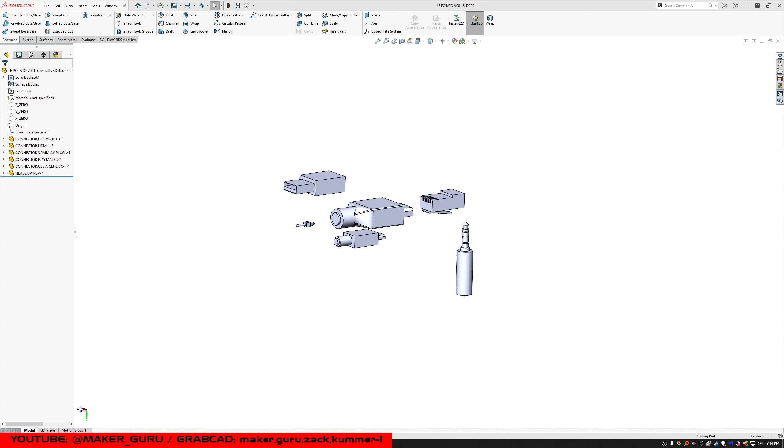Hello again, Internet. In today's video, I'll be modeling up a small single-board computer called Le Potato. It's theoretically a low-cost competitor to the Raspberry Pi, but in reality, you can't buy a Raspberry Pi anymore, so it's not in competition at all. You can still buy this, though.

In the audio for today's video, I'll be discussing the results of a research project I gave myself, seeking to find the best CAD software in the world in 2023, ideally something to replace SolidWorks.

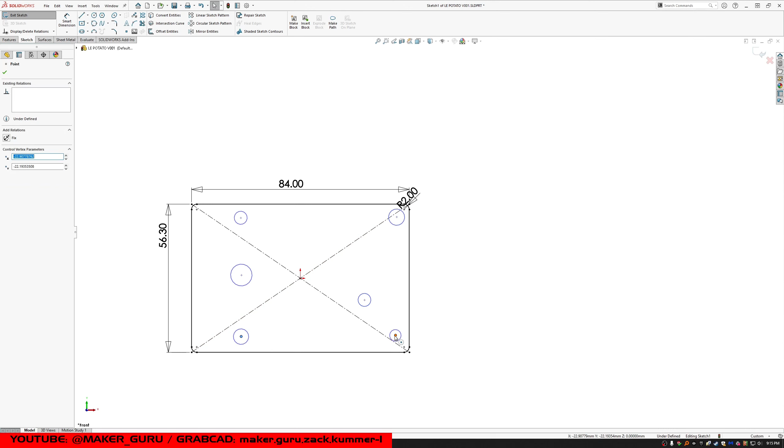So first, why? Partly, it's just a good idea in general. New software with new ideas and better design can come out, and old software can get so much better over time that it's effectively something new. There are still some mechanical engineers using AutoCAD, for example, and it's not because it's good or efficient or fast or anything like that. It's because they don't bother to look for something better, and they just kind of stick with what they're used to. And I don't want to be that person.

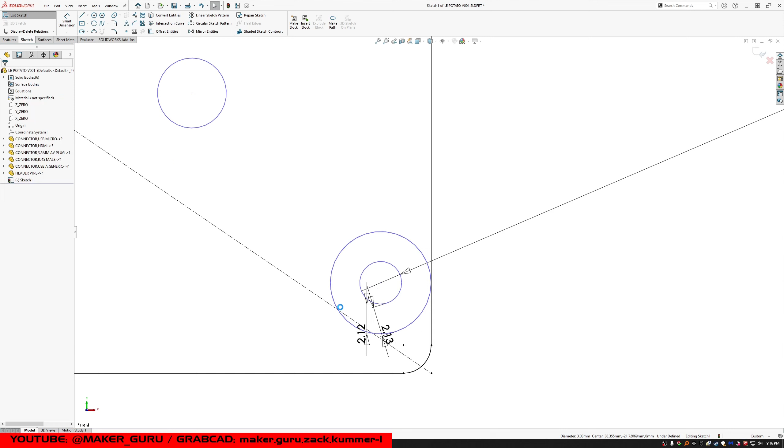Second reason has to do with SolidWorks itself. While it does continue to see some development, most users agree that it's been getting worse recently. SolidWorks 2020 seems to be the last good release. Service Pack 4 and Service Pack 5 are both pretty good. But after that, SolidWorks 2021 came out, and that started to be a problem - new bugs, stability issues, and some new features, but they're not really needed by anyone. Then 2022 is worse, 2023 is even worse than that. And at this rate, eventually it's just going to become completely unusable software if this pattern continues.

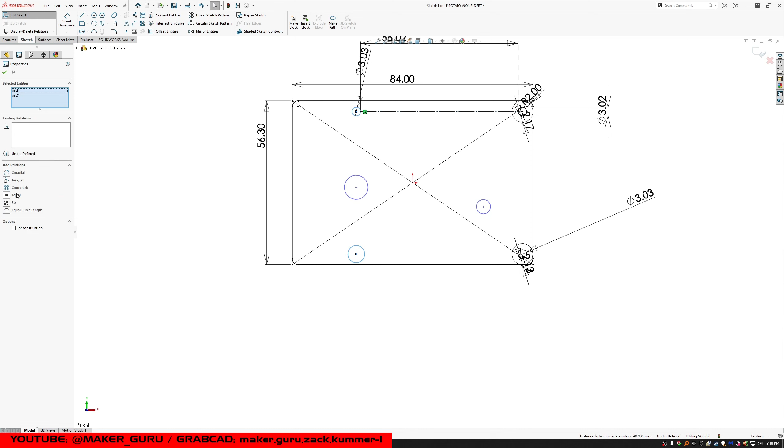So those who purchased SolidWorks 2020 can continue using it as long as they like. If they're on a subscription, obviously they can't, but if they actually purchase a perpetual license, they can keep using it. Those wanting to purchase 2022 today can still do that, or they can still purchase version 2020 today. But it's unclear how much longer this will actually be the case. Right now, most resellers I've seen only go back to 2019 or 2020. So over time, that's probably only going to go back to 2021, and then 2020 is just not going to be available for purchase anymore.

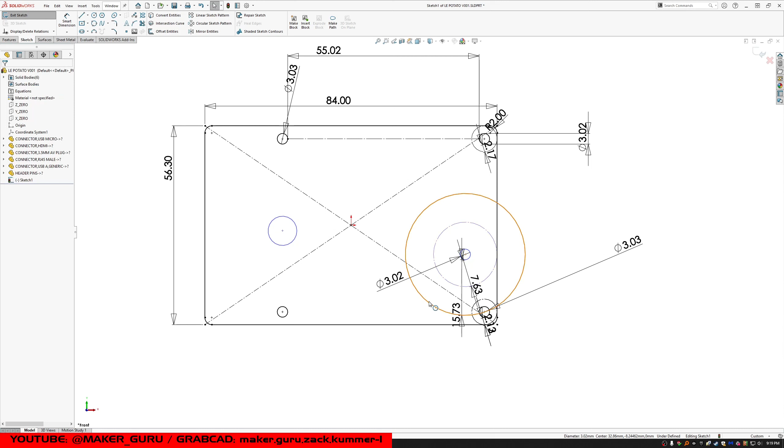Students and makers looking for low-cost licenses for non-commercial use, either educational or just making stuff for themselves, don't have the option for 2020 at all. Even 2021 is no longer available to students and makers. So basically, students and makers cannot get the best version of SolidWorks yet released. Those willing to pay thousands of dollars for a license can still get a copy, but again, might not be the case much longer. And even if we assume SolidWorks 2020 is still the best CAD software available in 2023, its current and future lack of availability is a serious downside. As someone who wants to teach people how to design things, teaching SolidWorks is starting to feel a bit awkward because of this.

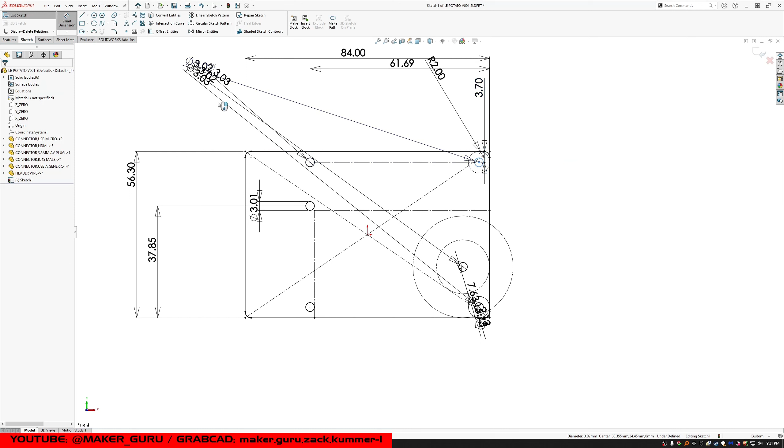So I started my research by looking online for lists of CAD software. I found several long lists, and after combining them and removing duplicates, I ended up with a list of 94 programs, including SolidWorks. Many of these were eliminated quickly just by looking at the product pages and seeing that they lack very basic features any mechanical designer or engineer is going to need in a typical workflow. Using this method, I was able to trim the list down to just 12 programs, including SolidWorks. And I'm just going to go through them alphabetically because that seems like the most logical way.

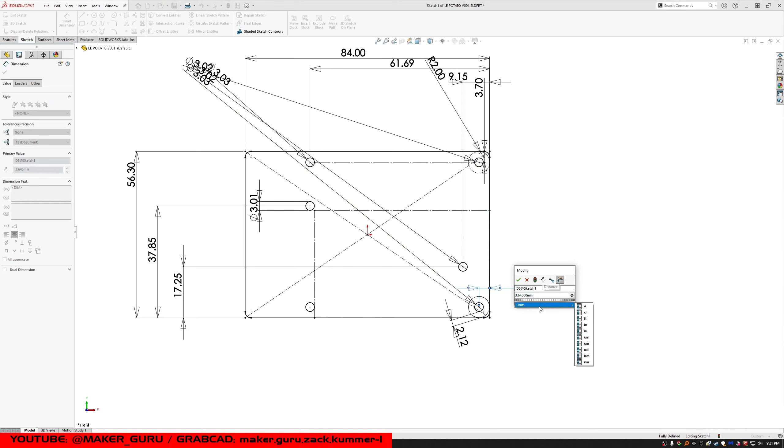So first, before I start the list, I should mention a few things. Cloud software - a couple of the titles on this list are cloud software, meaning either you don't install them on your computer, or you do install them on your computer but you need a constant internet connection anyway. And I'm not a big fan of cloud-based suites because, well, number one, not everyone's going to have reliable or fast enough internet to actually make use of them.

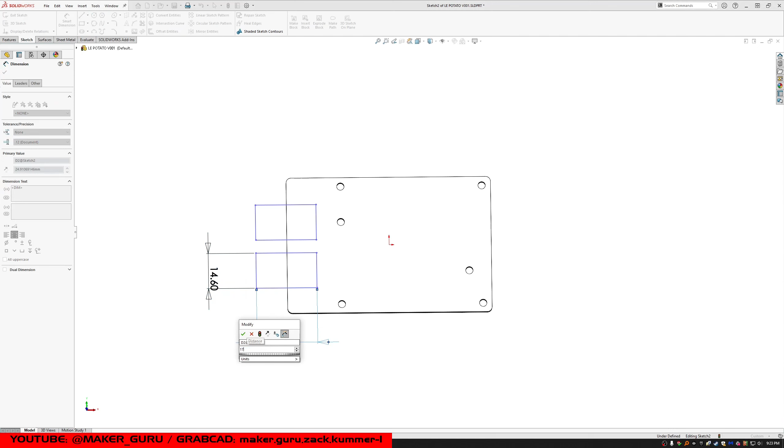But also, there's an issue of support. So if their servers go down, and it's not your fault at all - your computer works fine, your internet is fine, but their server goes down, their internet goes down, whatever - now you can't work. You just gotta wait for them to come back up. If they remain down because the company doesn't want to continue supporting them, or they discontinue the software, then your time learning that software is kind of a waste.

And you also might lose valuable data, to the point you can't use the software anymore. If you're lucky, you might be able to export steps before the software goes down, but even then, a step is not the same as a feature-based model.

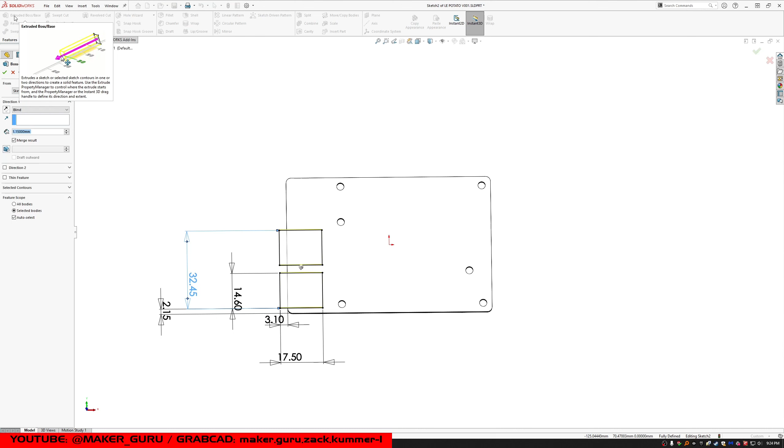Just a quick story. Years ago, I was using a cloud service provided by Autodesk, and it started out pretty good, as long as I had a good internet connection, which I didn't have at home, but at other places I did, so I just used it there. The software worked great.

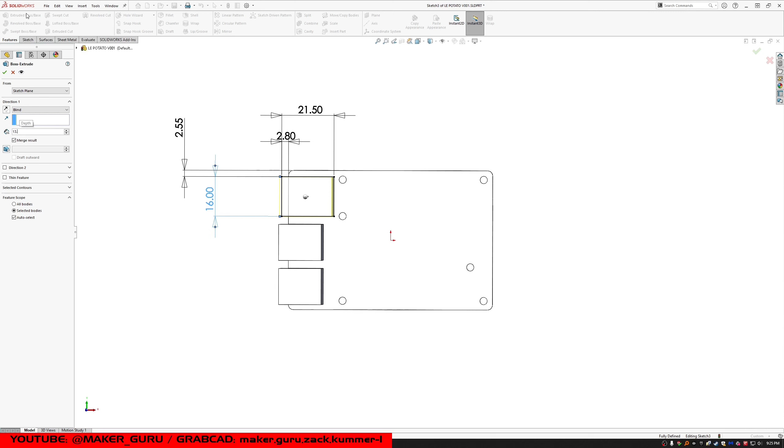But over time, it got popular because it was free and it worked great, and Autodesk did not invest in the servers. Over time, the service became terrible. What originally took about half an hour to process would now take several days. Then one day I went to log in and the service was just offline. My files were gone, the workflow I developed was useless, and there was no warning even.

So cloud services of all kinds have had similar ends. Usually they'll at least give some warning to allow users to download or transfer data, but not always.

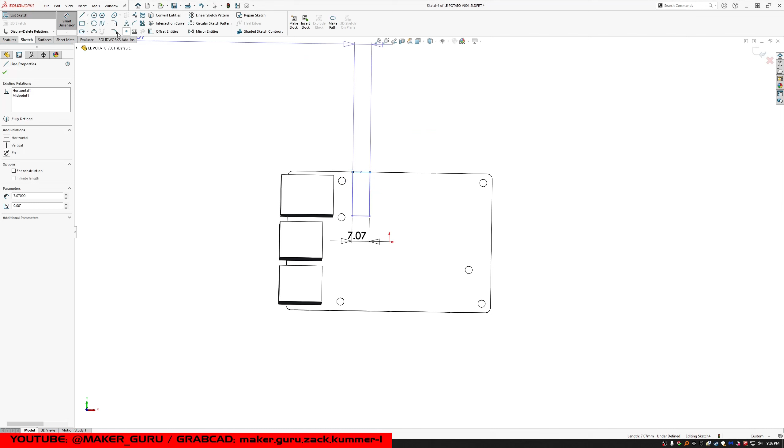Just as an example, about a week ago-ish, Google Stadia was taken offline, and that was a complete dumpster fire, because parts of it started going down like a month in advance. People had already paid in advance for stuff, and people had paid for games that now they can't get. Some people that paid for games get to keep them, but if they paid for them in a different way, they don't get to keep their games. It's a whole mess.

So while I'm giving cloud-based services a chance, if any of them are actually good enough to be considered the best, I have to consider that there's a distinct possibility things will not stay as they are, and it's possible those services might not even exist in a few years.

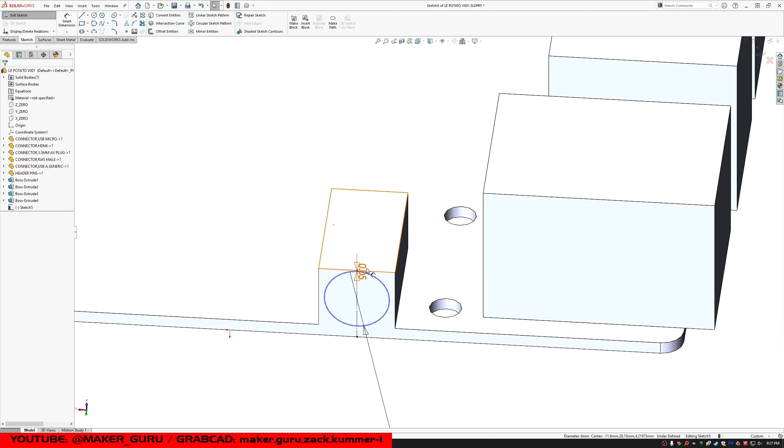Second, I need to mention subscription models. Traditionally, software came with a perpetual license, so you buy it and you can run it forever. You might want to buy another version next year because it's got new features and whatnot, but you don't have to. If the current version does everything you need, you can just keep running it.

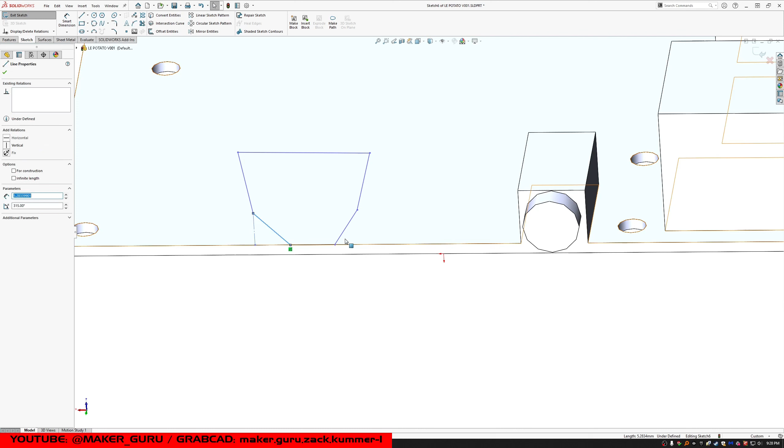Nowadays, subscription software is getting a lot more popular, so the initial expense is usually lower, but over time, at a couple years or a few years, the subscription ends up being about the same, and then eventually it ends up being more expensive.

That's the whole reason they switched to a subscription model. If they wanted to lower the price, they'd just lower the price. The whole point of subscriptions is to make more money off of you. So that's a bit of an issue.

But what's more significant is that it times out. If a company wants to just stop selling the subscription, well, you don't get to keep using the software. That's how it is. And a lot of the titles on this list are subscription only, which is a big downside for those reasons.

I'll still give them a fair chance, but if it turns out one of these titles is currently the best, I have to consider that new versions might not be, and you will not be able to continue using current versions forever. Alright, so on to the list.

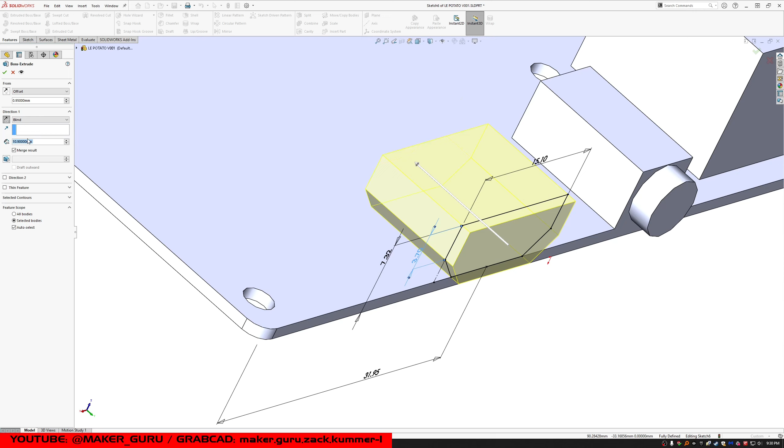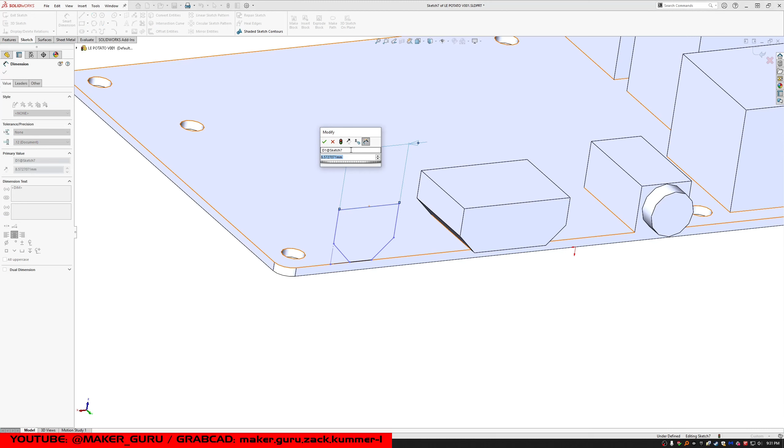Autodesk Fusion is a cloud-based CAD suite. In spite of being cloud-based, it looked pretty promising at first. Some things I consider essential are missing, but it also has some pretty cool features that SolidWorks doesn't. It's even free under certain circumstances, which is a huge plus. Even if you're a company that's selling stuff, if you're small enough, the software is free. And even if you're bigger, it's not that expensive, at least by the standards of CAD.

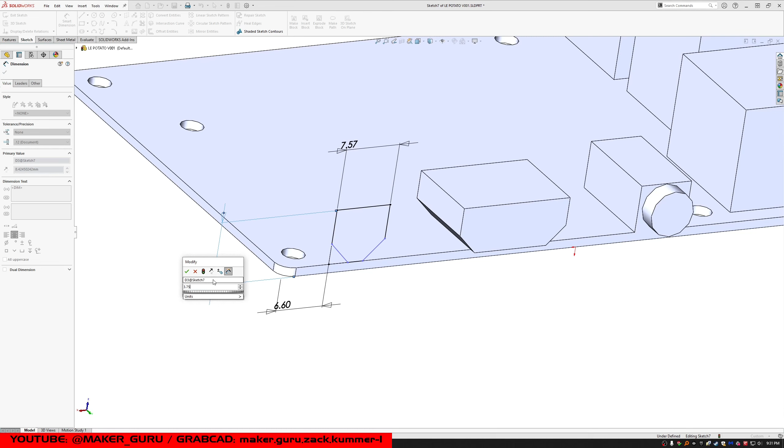Modeling is pretty much what you expect if you're used to SolidWorks. There are differences, but they're minor. Assemblies are different than SolidWorks, and even people that use Autodesk Inventor, made by the same company, are going to notice pretty significant differences. Drawings are also completely different.

Overall, it does work well. It's a bit slow, a bit choppy sometimes, and there's a bit more waiting around than I'm used to, but it does work. For free, I can't really complain about those issues. It's also pretty stable, which is rare in CAD.

The big issue I ran into was with assembly complexity. The program basically just falls on its face with assemblies containing over 2,500 parts. That includes screws, nuts, and washers.

It doesn't take that long to get to 2,500 parts. Some people might never run into that, but for me, assemblies with over 2,500 parts are pretty common.

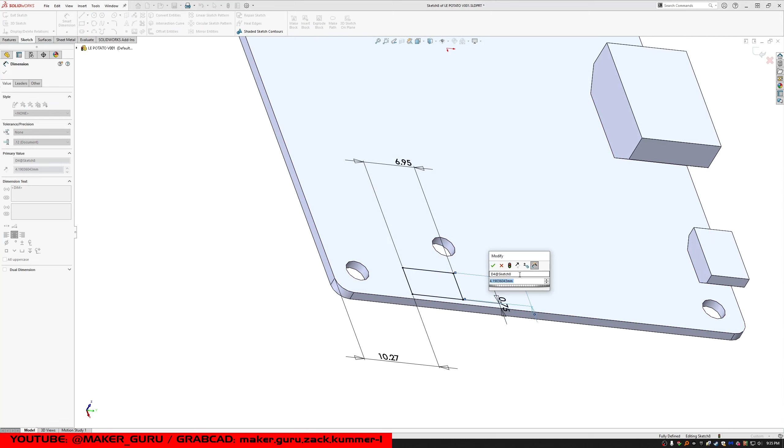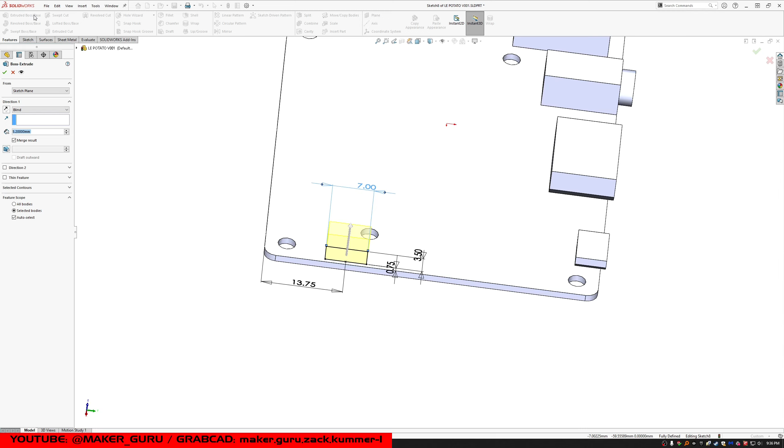This has been an issue apparently for a while now, and I don't know if it's something deep in the engine that they can't fix, but even Jeff Strater, the software architect of Fusion 360, the guy in charge, recommends using something else if you want assemblies with over 2,500 parts. So I can't recommend Fusion because of this, but to a certain customer wanting something free and making relatively simple assemblies, it could be a potentially valuable resource.

Next is Autodesk Inventor, which I had some trouble getting. They do offer student licenses, but I was unable to get one because the educational nonprofit I work with uses .org instead of .edu for their email addresses, so apparently that's not good enough for Autodesk.

So I started looking at reviews, user comments, Reddit, all that stuff, and I saw a lot of complaints, but also some praise. So I really needed a copy to review, but I wasn't about to pay what they were asking just to get a review copy.

Then I started a new job, and when I came in, I saw I had Inventor 2023 Professional on my desktop. That turned out to be a bad thing because now I have to use it at work. But it was a good thing in the sense that I could use a fully functional version of it as much as I wanted, and unfortunately far more than I wanted.

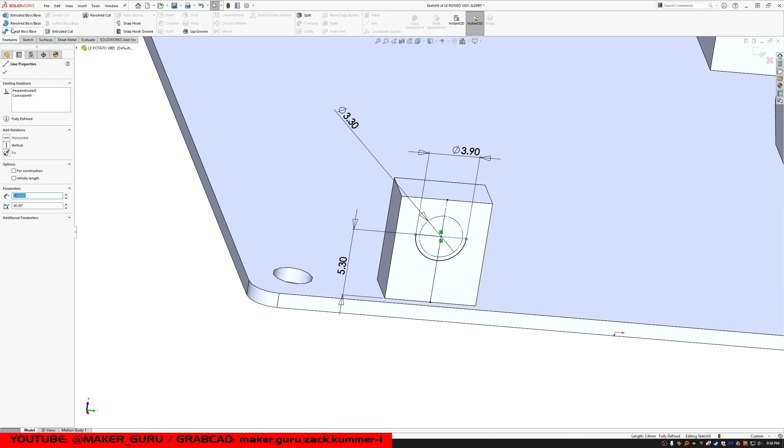It only took a couple days to become familiar with it. I'm still learning workarounds for missing features and bugs that the program has, but the program itself isn't that complex, so it's relatively easy to learn.

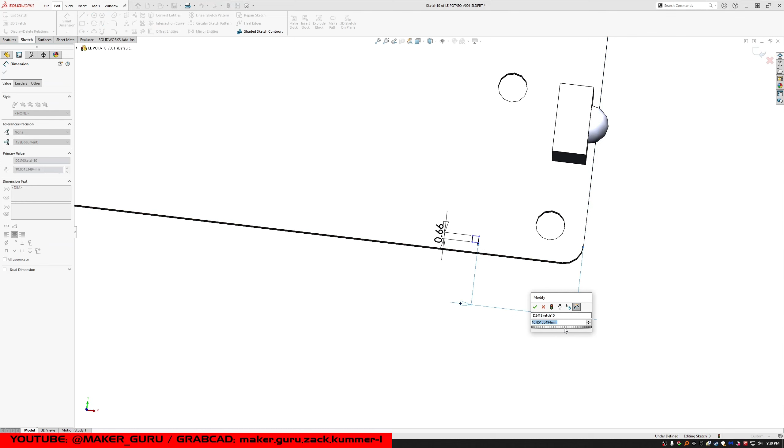Modeling is almost the same as SolidWorks. Assemblies are different, but familiar enough. The big issues mostly have to do with some pretty basic features being missing and some other features being completely broken or so poorly designed that they can't do what they should be able to do.

Drawings are radically different, but the interface doesn't take that long to learn, and most of making a drawing is not really related to the software at all. Ideally, the software just kind of gets out of your way and lets you make a drawing. And a lot of making a drawing is just knowledge about what a drawing should be once it's printed out.

Stability is terrible. Modeling a part is relatively stable. Making a drawing, a lot less stable. And assemblies are downright crash happy. I think I averaged over one crash per half hour of use at this point.

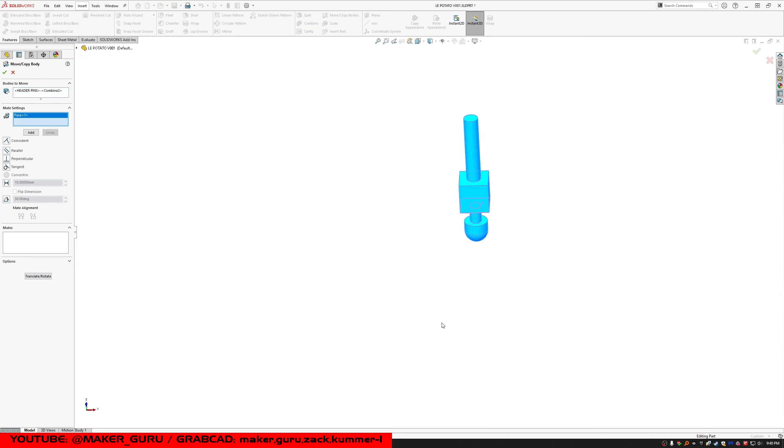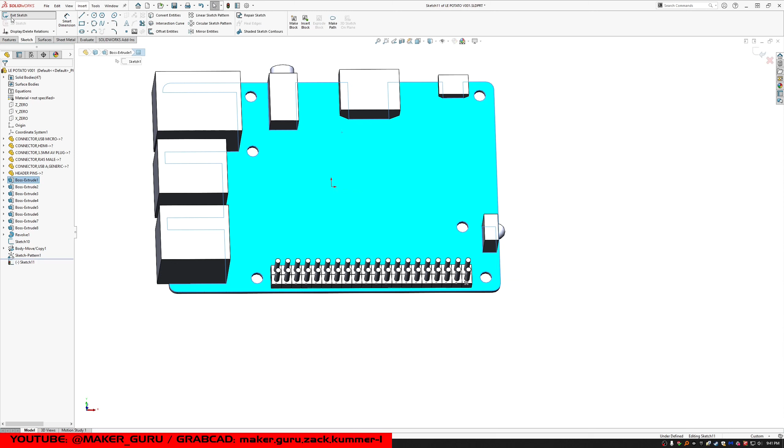A lot of the issues are related to certain feature types, others related to using assemblies and drawings that were made in the 2022 release and earlier. So they've got a serious issue with backwards compatibility on their own files that crash all the time, to the point where it's not uncommon for someone to spend a week remaking an assembly and a drawing package just so that it works in version 2023, even though it worked fine in 2022.

It's also slow. Things that should be instant can take a minute or two just to process. So like, want to open a part with a single feature, no external references, a single extrude feature, that's it. It's already open in the assembly even. You just want to open the part itself. That can take over 30 seconds.

Relatively simple assemblies that should be fast, they kind of drag the computer down. And the computer I'm working on is a good system. SolidWorks runs like a dream on it. It's also very click happy. Almost everything I do requires one or two extra clicks versus SolidWorks, sometimes more. Overall, it is very capable, but it's frustrating, and you want to save very, very often in spite of the fact that saving takes way too long.

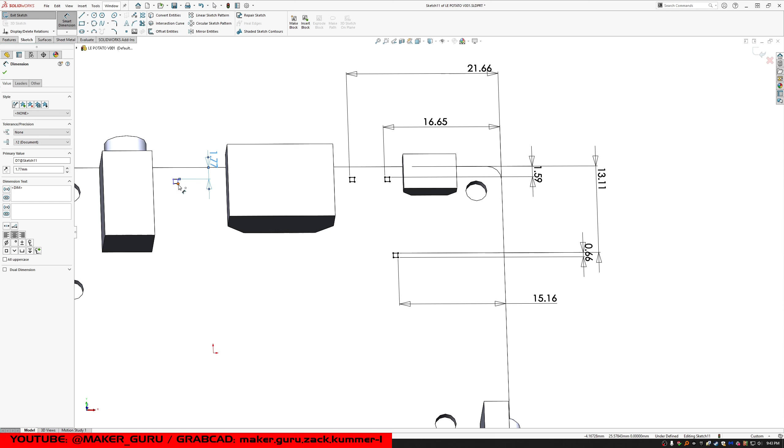Talking with other engineers that have been using the software longer, it seems that most of the issues I ran into are known issues that they all kind of struggle with or have developed procedures for getting around. Even if they've been using the software for years, they're still struggling with these issues.

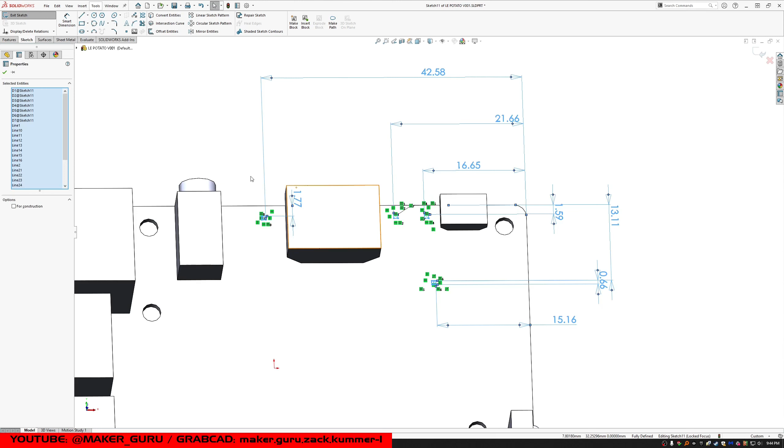They also say the software has been going downhill for several years. So at this point, the only reason anyone upgrades is to be able to work with files saved by newer versions, because apparently you can't buy old versions of the software, so the company is kind of forced to upgrade every year, because they're adding seats every year. They're getting new people every year, more people every year. So every year they have to buy the newest version for those people, and then for everyone else to be compatible with those people, everyone has to get the new version. And that's the only reason they're upgrading at this point.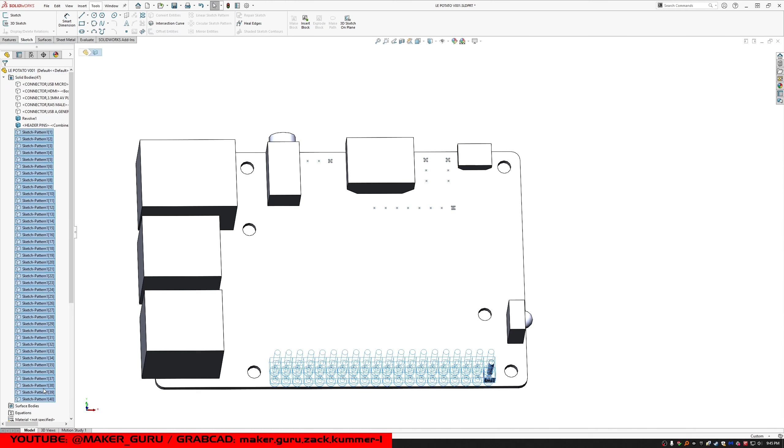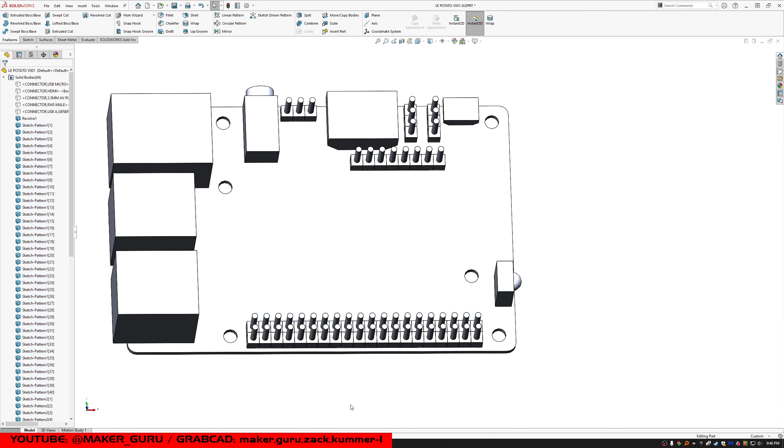I'm generally trying to avoid talking about price because that could change at any time, but from what I understand, it is a lot cheaper than SolidWorks—if you ignore the wasted time, the rework, and the potential for defective products that are far more likely in a program like this that doesn't have any kind of quality validation tools. So I'd say it's inferior to SolidWorks in almost every way. Currently the price is lower, but once you figure all the extra time you're paying people just to fix things that shouldn't need fixing, it probably ends up being a lot more expensive.

So CATIA, I love CATIA. CATIA is awesome. It's fast, it's stable, it can do basically everything. It's a bit click heavy sometimes, and the graphics don't look good, but I can forgive those minor issues pretty easily for something with rock solid stability and incredible quality.

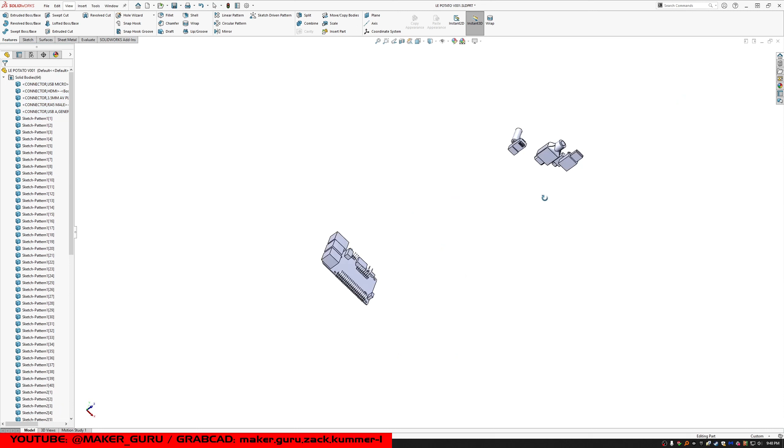What's harder to forgive is the price, and there are no official price lists for the software, but from what I understand, this one is ridiculously expensive, to the point where the annual fees could be more than what the engineer using it is actually taking home. It's easily the most expensive software I looked at on this list, several times over, and again, I try not to talk about price too much, but it's a serious concern on this one. It seems to be the main reason people don't use it.

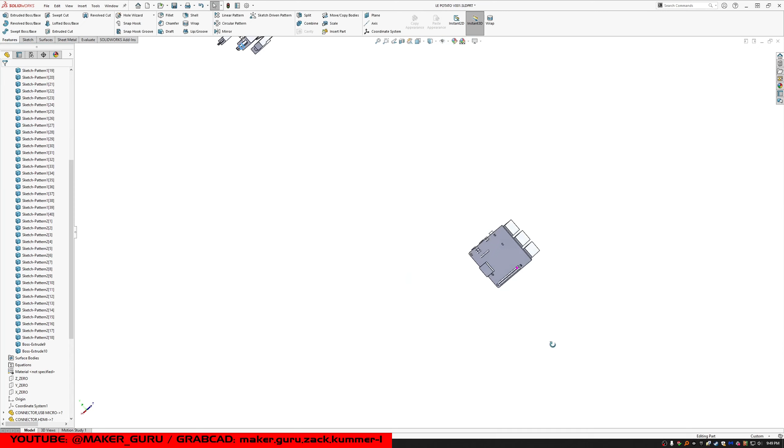There are cases where designs are complex enough that CATIA is basically the only option, just because it's so fast with complex assemblies. You can model things up that are bigger than any other CAD software is just gonna fall on its face, and CATIA, well, it might not be really fast, but it's gonna handle it just fine. So in some cases, CATIA is the only option. I guess it's the best option in those cases—also the worst, of course.

There might also be cases where spending money isn't a big concern, but that's got to be relatively rare. I think for most users and most companies, the expense is just simply too high to recommend this. But again, if money is no object, or you're talking about incredibly complex designs, CATIA is probably the best software I came across in my search.

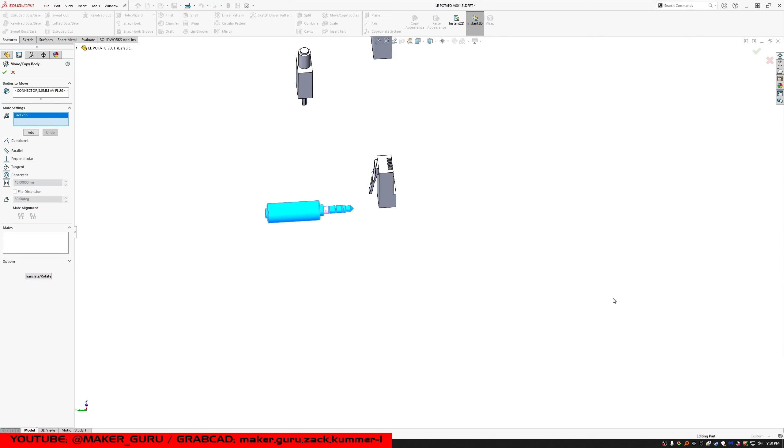Then there's Creo. Creo's garbage. Just ask any Creo user, or ask a Wildfire user—that's what it used to be called—or ask a Pro Engineer user, that's what it was called before Wildfire. They keep changing the name of the software.

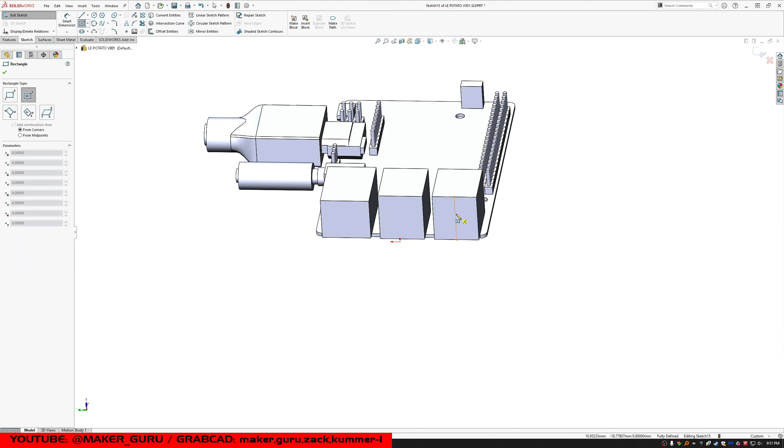It's that bad, they have to keep changing the name. Because over time the entire industry is just like, oh well, Pro Engineer is garbage. So, but what about this Wildfire thing? New software, ooh, maybe this is better. And then, oh, Wildfire's garbage, but Creo, ooh, new software, maybe this is better. It's the same exact software, it's just a new name.

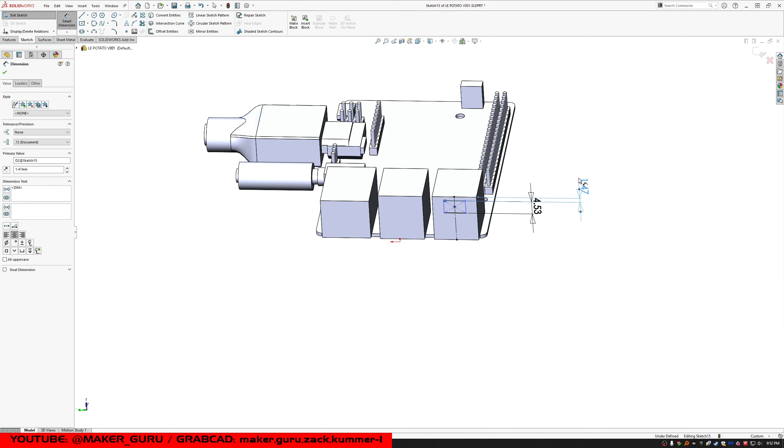So it's slow, it's unstable, it lacks basic features that SolidWorks had last millennium. The company behind it, called PTC, does some pretty shady things to get companies to adopt it, and I'm not really going to go into it because a lot of it is through the grapevine—oh, he got fired because he did this with the salesperson, it's pretty shady.

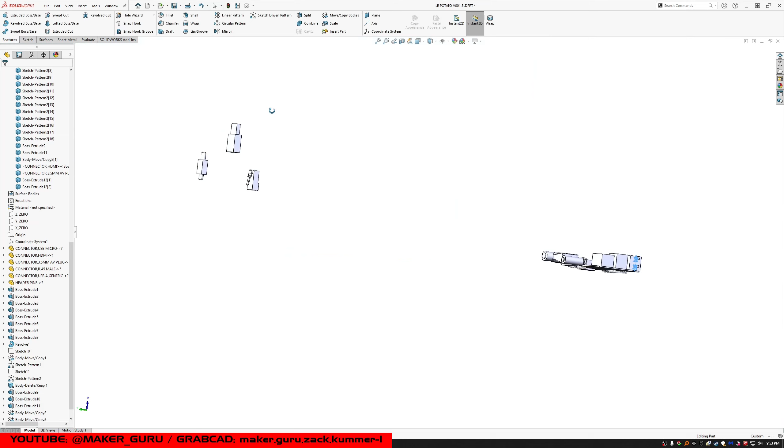One example I can definitely go on the record with is that I have personally seen them fake videos at a product launch event to convince people to buy software based on features that didn't exist and were not going to exist in the software they were selling. So it was just straight up false advertising, and they apparently got away with it, so they'll probably keep doing it. Creo's garbage, PTC is garbage. Avoid it if you possibly can.

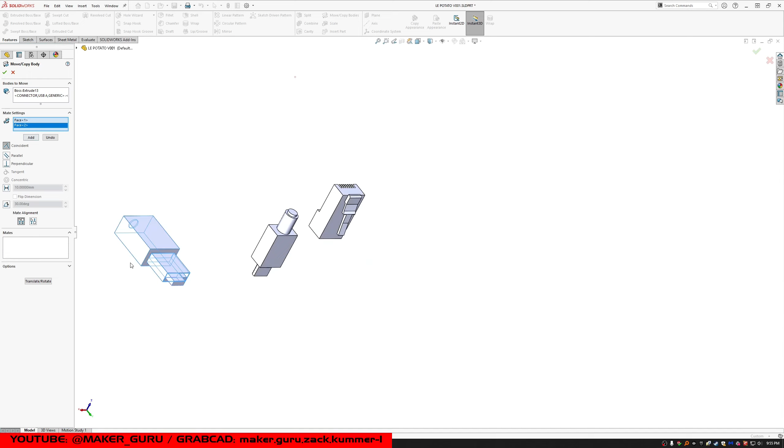Next is FreeCAD. FreeCAD is free, it's even open source, which is pretty great. It does the basics, but it's pretty limited when it comes to more advanced modeling. It's a bit slow, and pretty unstable too. It's getting a lot better than it used to be, but it still has some pretty big stability issues.

There was a time I had very high hopes for this software. I used it years and years ago, and every few years I look at it again. Every time I go back to it, it's a bit better, but at the rate it's progressing, it's going to take many years before it's competitive, even with something like SolidWorks 2006.

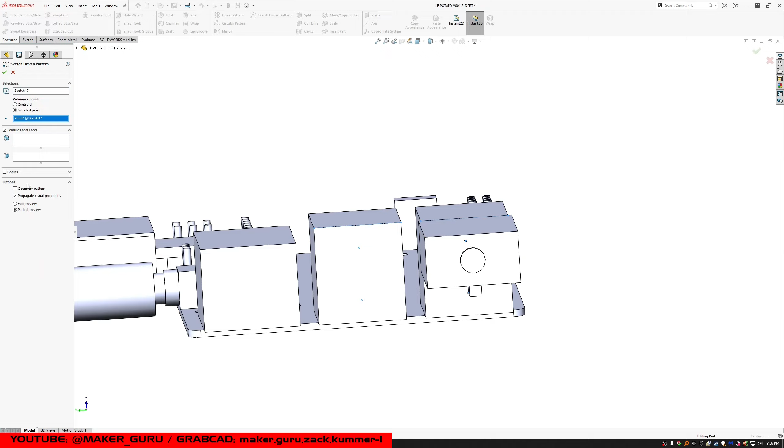There also seems to be an issue with the underlying engine. This engine is also open source, but it's developed and maintained by an unrelated team. Looking at discussions among developers, feature requests, Reddit, and all that, it appears the engine is really holding FreeCAD back, preventing a lot of the features they want to implement, and possibly causing a lot of the stability issues as well.

I think without a new engine, or at least a radically modified version of the existing engine, this software really doesn't have much of a future. It doesn't appear anyone on the FreeCAD team is working on improving the engine at this time, as far as I can tell. But I'm going to check back with the software in a few years. Maybe it'll be better by then.

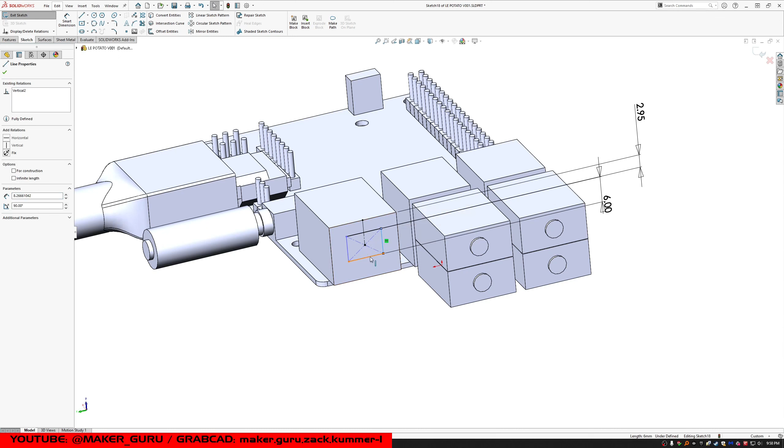For now, I really don't think it's good enough for a professional. And even if you want free software that you're just going to use occasionally, I still think Fusion 360 or Onshape, which I'm going to talk about later, are probably still better options. But if you want something that you know will always be free, this is the only title on the list. Fusion and Onshape, at any time, could start charging money for students and hobbyists. There's no way to say.

FreeCAD, it's always going to be free. Even if they try to start charging for it, you can just download an old version, no big deal.

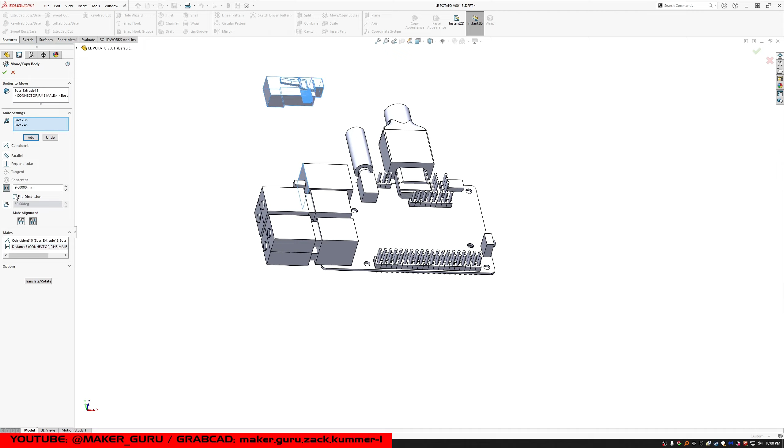IronCAD. This software can't even make a decent mechanical drawing. They don't seem to be investing the resources necessary to do even the most basic things in this software. And I also stumbled across some pretty misleading marketing from this company. So I think with more investment and a bit more honesty, this might be a decent option in the future.

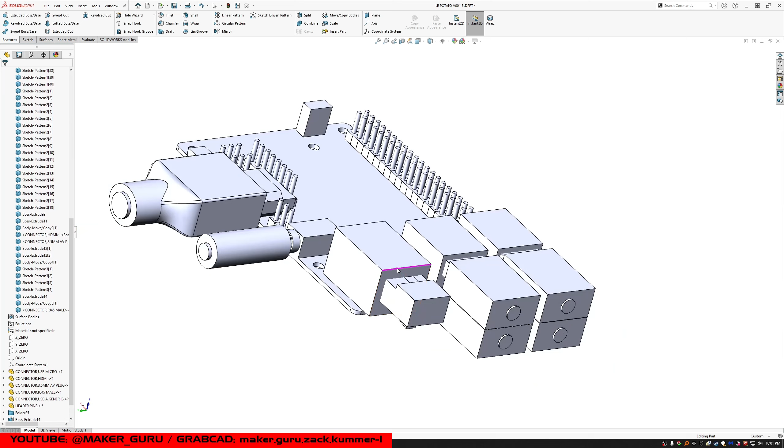2023 considers anything not made in KeyCreator 2023 to be an imported file, and that includes files made in KeyCreator 2022 and earlier. So what this effectively means is that you're basically importing a step file when you're opening an old file made in this software. So you're not getting your history-based modeling or your parametrics or any of that.

That's all gone. Also, drawings don't work with imported files, including old files made by KeyCreator. So I cannot recommend this program at all, because it just basically breaks all your files every year. That's insane. So even if it was free, I couldn't really recommend it because of that. And also, I played around with it, and it is just kind of junk. So not a good option even for free, and it's not even free.

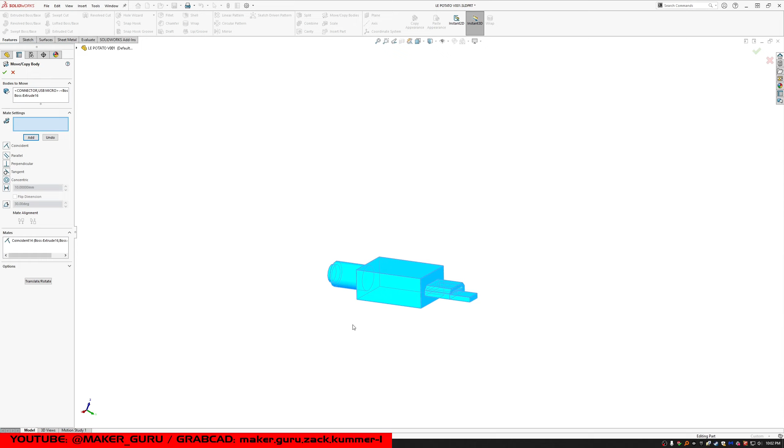Next is NX by Siemens, which is trash. It does have a lot of dedicated fans that have been using it for years, and they will defend it to the death. I suspect, based on that, it must have been a lot better in the past, because the current release is downright useless.

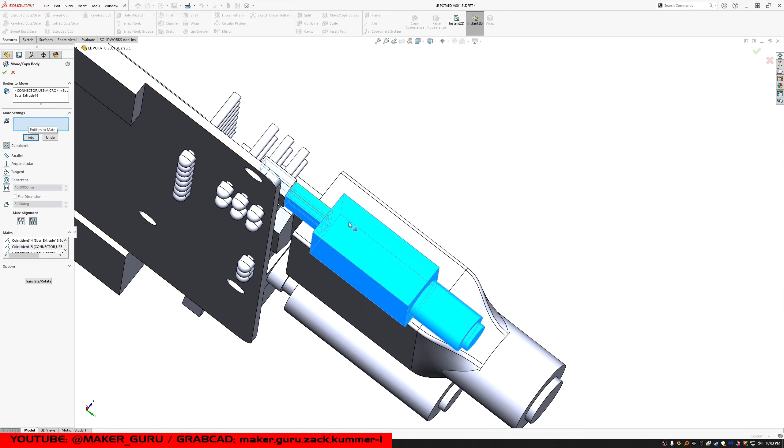I had multiple errors just opening the default part template. I had errors saving a file, and then I'd try to save the file again to the same location, same name, no changes at all, and it worked fine. So I don't know what's going on.

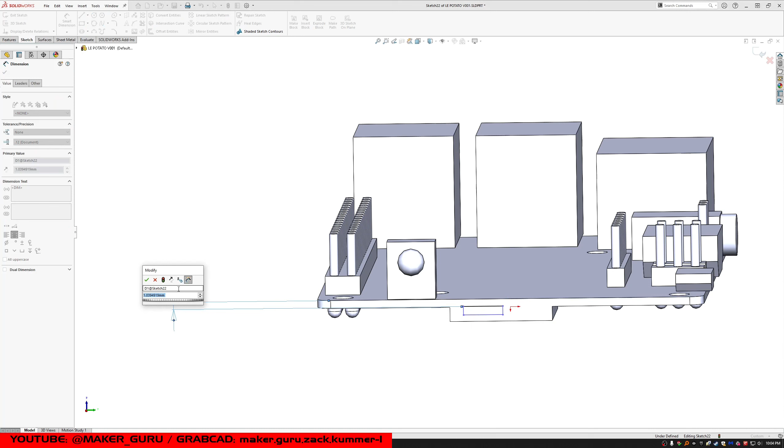When it didn't crash, it hung so hard, I needed to terminate it from the Details tab of Task Manager. Normally there's a few different ways that Windows allows you to close a hung program. This is the most extreme one, short of just turning the computer off.

The student version is extremely limited, to the point I wouldn't recommend it for any student. Basically, I can't recommend this software for any reason. Even if it was free, I couldn't recommend it for any reason.

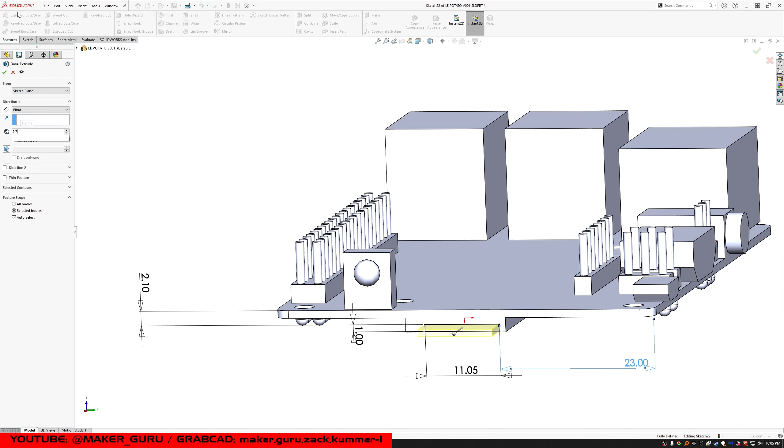Onshape is a cloud-based CAD suite designed by a former SolidWorks engineer, which makes it an interesting contender just based on that. I used Onshape several years ago, right after it came out, and I was impressed. It didn't have everything I needed, but it was a good start, and at the time it was receiving updates constantly. I assumed it would be one of the best suites I tested after all this time, and I was wrong.

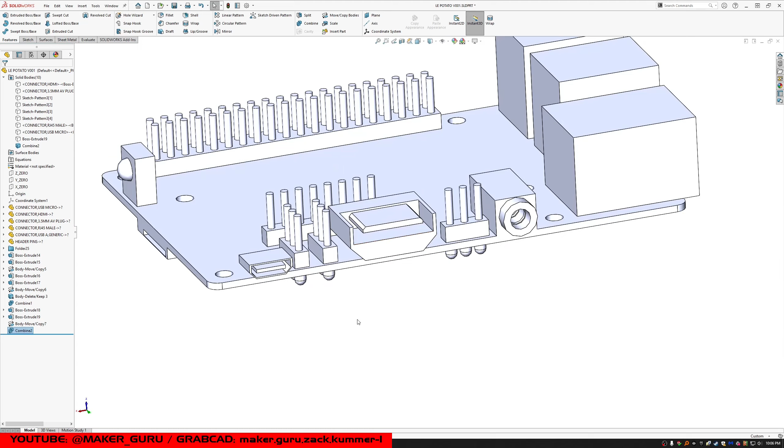The pace of feature updates seems to have slowed and then essentially stopped. There is a student version available for free, although the limitations are significant. But that's kind of a diversion. Here's the thing: it's not evolving anymore.

Apparently, sometime around the end of 2019, the company was purchased, and the company that purchased them is PTC, the people behind Creo. And it seems to have just ground to a halt, and if anything, it's actually been getting worse since then.

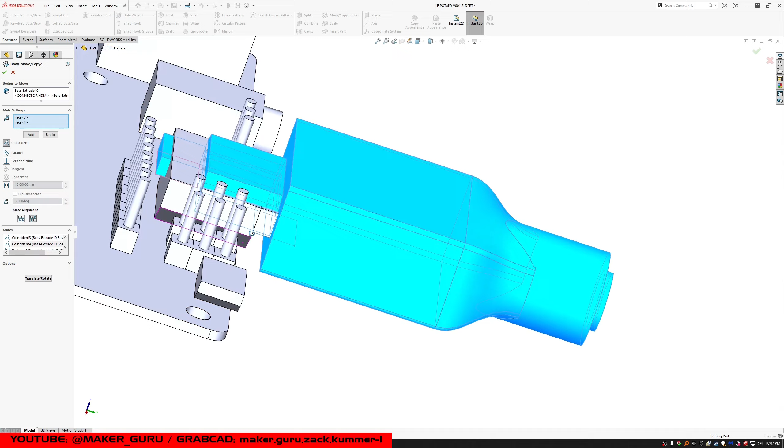I spoke earlier about concerns with cloud-based software, and one of the big concerns is with dropped support. If a company just turns off the servers and you lose your files, you lose the time you spent learning the software. I kind of expect that to happen with this software because PTC really isn't doing anything with it. They aren't pushing it the way they need to push it if they want to keep it alive. So I just don't see a future here. I think eventually they're just going to shut down the servers, and this will be a footnote in the history of CAD, and you won't even be able to get a copy because it was cloud-based the whole time that it existed.

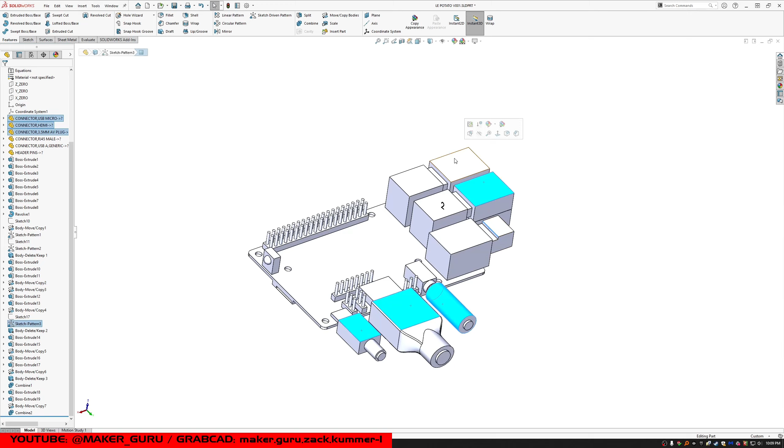Solid Edge, also made by Siemens, the company behind NX. This is their low-cost entry-level stuff. Surprisingly, it's better than NX in spite of that. It's faster and it's more stable. It also has more of the basic features I expect to see. It's still slow compared to SolidWorks, both in terms of waiting for the software to process commands, but also in terms of features requiring more clicks and more user input to do the same things.

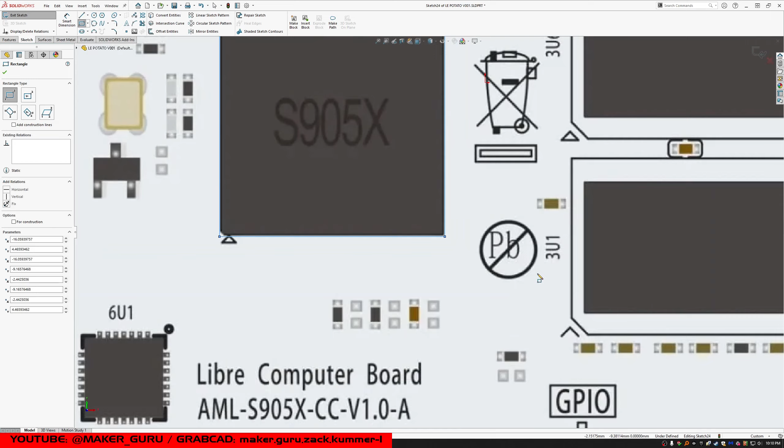It has something called Synchronous Technology that they think is a big selling feature, or at least marketing seems to think so. They seem to think it's this great new thing that they invented, and maybe they got a patent, but you can get a patent on a rectangle. Actually, it's not something they invented. It's basically just Instant3D from SolidWorks, except that it doesn't really work.

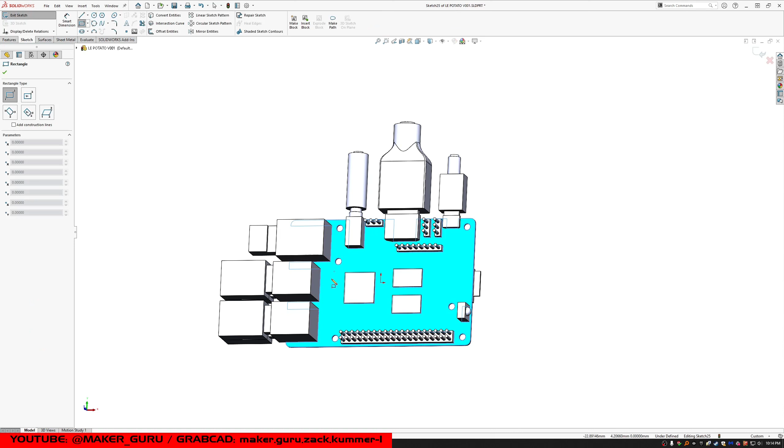Not only is it downright useless, but they made compromises that were pretty significant just to get it to function at all. These compromises slow down the drawing and modeling by adding extra steps that would be automatic in pretty much any other CAD software. Siemens even recommends not fully defining sketches and features, because if you fully define them, their fancy technology doesn't work anymore. That's what adds all the extra clicks, because things that should automatically be locked down when you enter a dimension or whatever, they're not, because if they were, then the big selling feature, or what they think is the big selling feature, wouldn't work anymore.

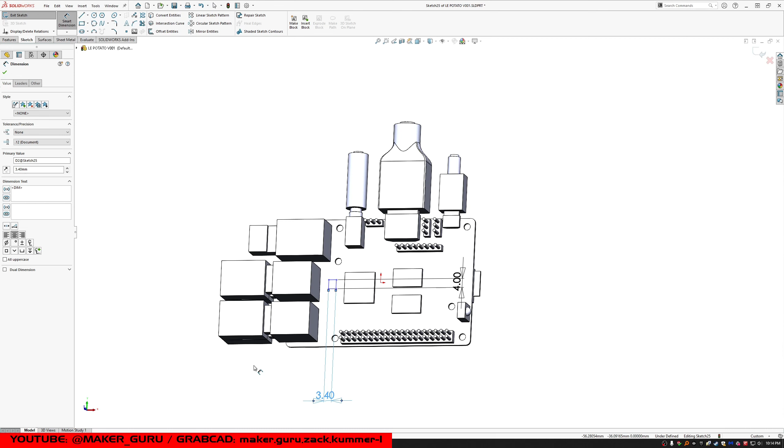If they were to remove this feature and revert all those changes they made to make it functional, I think the software still wouldn't be very good, but it would be a lot better than it is now. So hypothetically, if they made Solid Edge free, which I don't think is ever going to happen, but if they did, I think it could be competitive versus Onshape or FreeCAD, with a couple years of work under much better management. Currently, it's worse than the free options.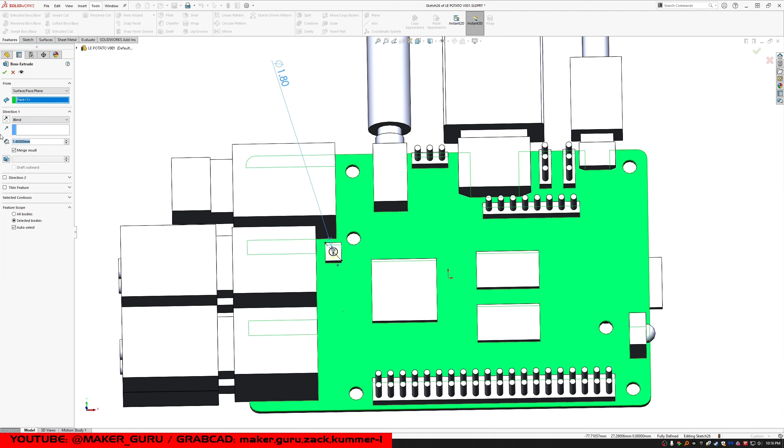SpaceClaim is a bit of a mystery. I was able to get a student copy, and I was able to work with it. It's pretty limited, not just because it's a student edition, but it's not that the features were locked out — features didn't exist, and it had a ton of issues. Like CATIA, it offers paid add-in modules, which can really make the price skyrocket. Some of those add-in modules are for very basic things that really should be included in the software to begin with. You shouldn't charge extra for things that are just basic features.

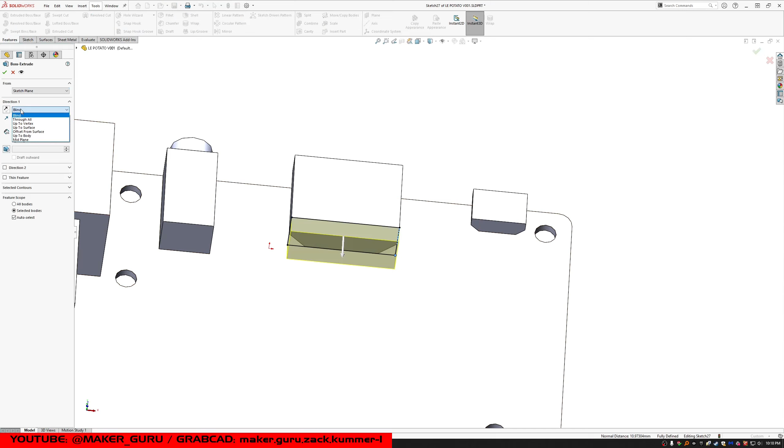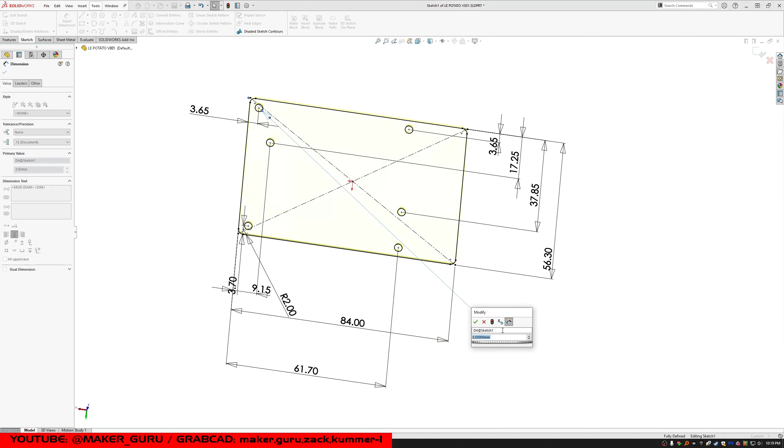Overall, I'd say FreeCAD is better in every way, and I couldn't find a trustworthy price for this other software. They don't sell it directly, and resellers range from sketchy to blatant scams. I saw prices ranging anywhere from $250 to $10,000 for the same version of the same software. I'm trying not to talk about prices, but this is just weird. You don't see this with other software - you might see a difference of 10% here and there, but not $250 versus $10,000 for the same software. None of the resellers I found actually appeared to be legitimate, and almost all of them seem to be in Malaysia, which I can't quite put my finger on why.

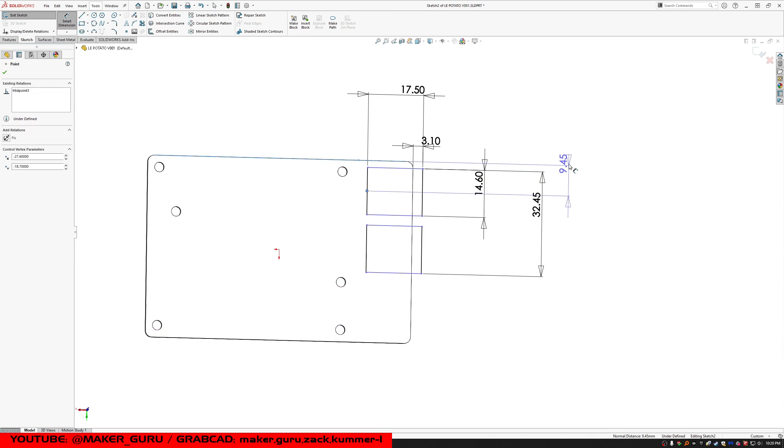I sort of don't believe the software is actually meant to be used, because it's useless junk. But there's other useless junk on this list that they don't seem to want to sell either, except through these resellers, which are all really shady. I don't know if this is the case, but I got a very strong impression that this is some kind of money laundering scheme. That's the only thing I can think of - that they'd have a reseller structure like this with radically different prices. Maybe it's some kind of tax thing. I'm not sure exactly what's going on, but I don't think they're trying to sell design software. I think they're trying to do something shady with money. So I'd avoid this one like the plague.

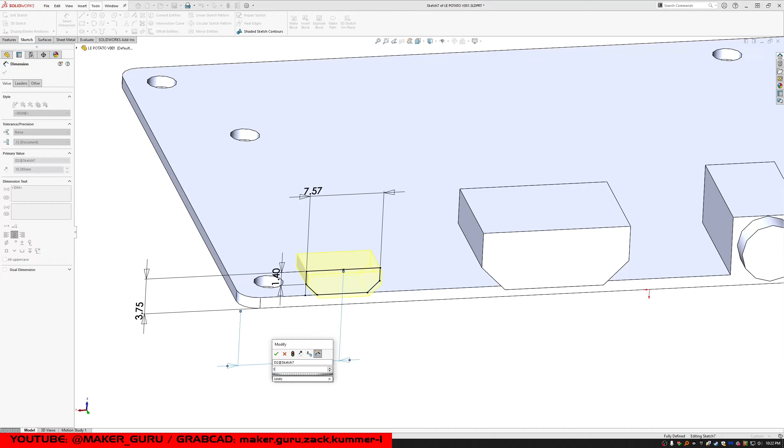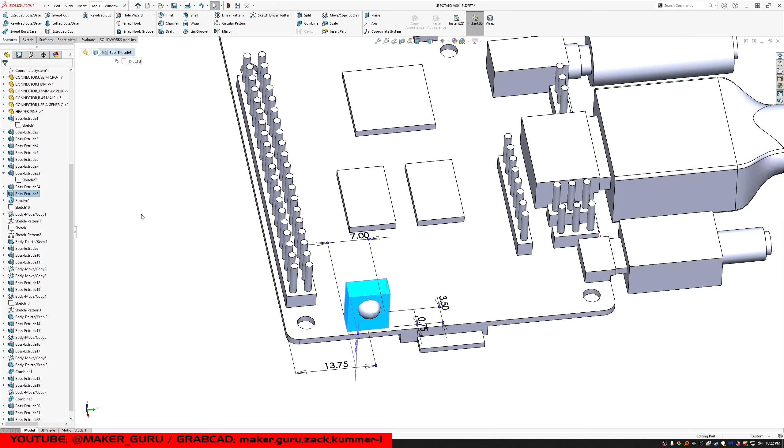So with all that, the list of 12 is narrowed down to one: SolidWorks. And that's not what I wanted to find out at all. I wouldn't have gone through all this if I just wanted to keep using SolidWorks. Ideally I wanted something better. It doesn't exist as far as I can tell, not unless you want to pay for CATIA. I'm actually a bit amazed - 94 programs on my initial list, 12 serious contenders on my second list, and in the end the two best options I found were both made by Dassault Systèmes.

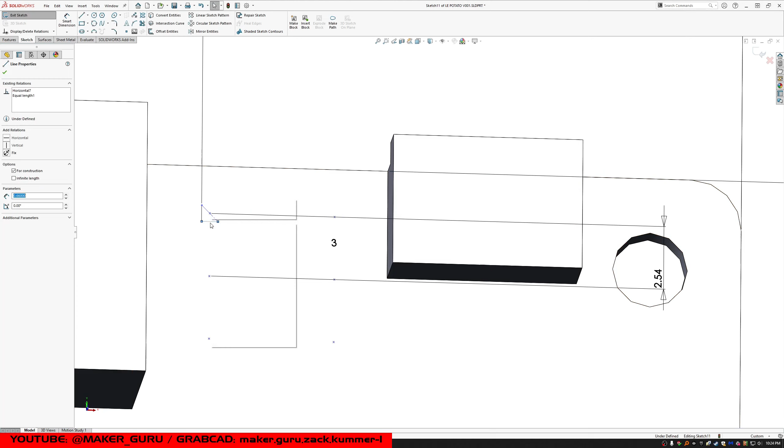Autodesk makes two different programs on this list. Siemens makes two different programs on this list. PTC makes two different programs on this list. And none of them are as good as SolidWorks, which in turn isn't as good as CATIA. I'm not sure how that happened. I'm really not sure what can be done about one company having a sort of monopoly on quality CAD software. And to be clear, I don't think Dassault is a great company - or at least I don't like their practices, and I think their quality is going downhill - but somehow they're still decidedly the best.

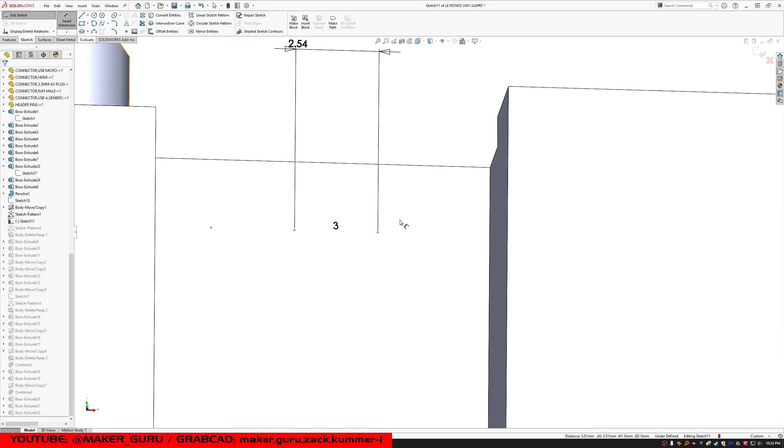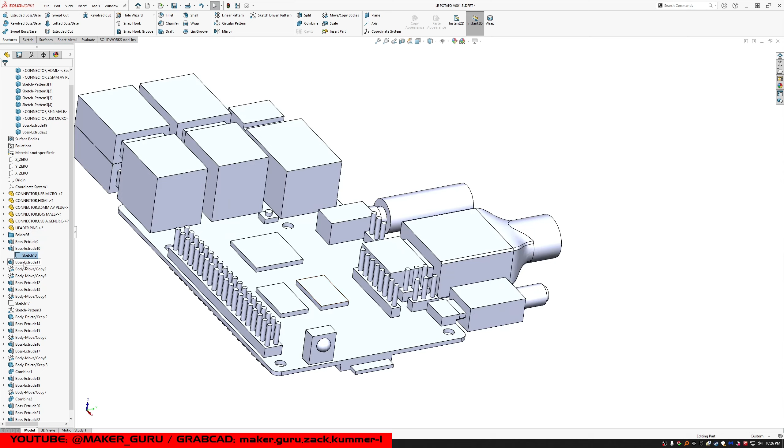Now, in the end, the recommendation I'd have is - well, I have three recommendations depending on your financial situation and your needs. If you're doing relatively simple things, working for a small company or doing stuff at home for yourself, probably your best option is Fusion. It'll probably remain around for a while. I don't know if it'll continue to be free forever, but for the time being it is. I'm guessing, based on the fact that it's relatively cheap, even if you want to pay for it, it's probably not going to be insanely expensive, or at least not for a while. So Fusion's a pretty good option right now.

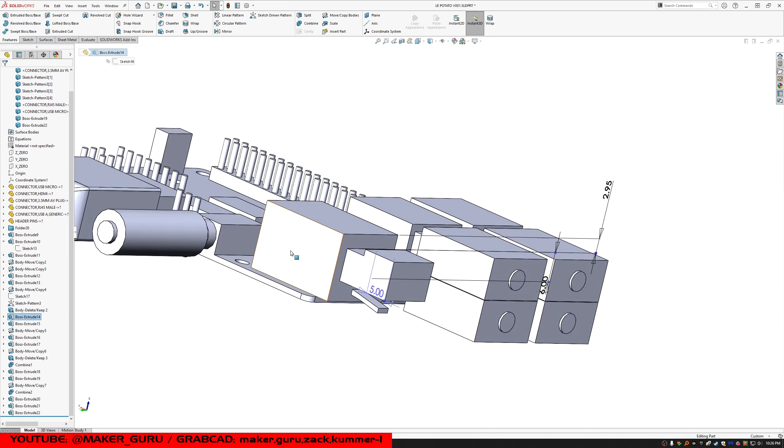If you want something completely free, that's going to be free forever - even if they stop making it, you can keep using it for free - FreeCAD is the only option in the entire list that qualifies. It's got a lot of downsides, but it's the only one that meets those qualifications.

If you're a typical designer doing a typical workload, SolidWorks all the way. It's more expensive than some of the other titles on this list, less expensive than others, but the titles that are cheaper - in the end, after you factor in all the wasted time and wasted resources you put into working with those other titles - SolidWorks ends up being the better value. And then on the high end you've got CATIA - if you need CATIA, then obviously get CATIA. If you don't need CATIA, then you probably don't want to pay for it. So I guess I said three, but there's actually four recommendations there for you.

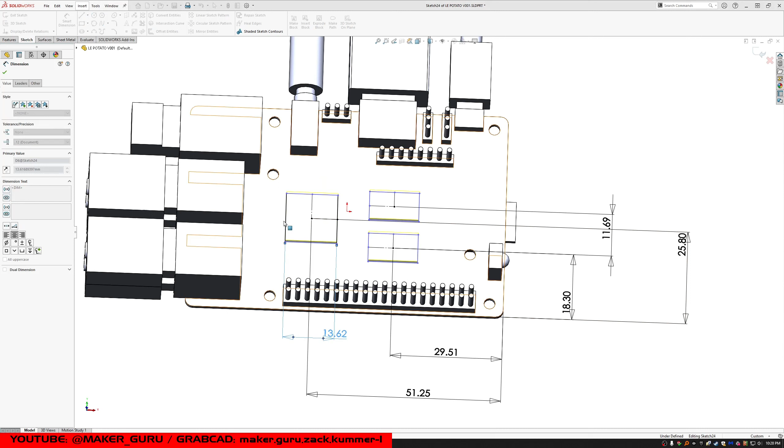So what do you think? Did I miss something? Did I just trash one of the programs that you love?